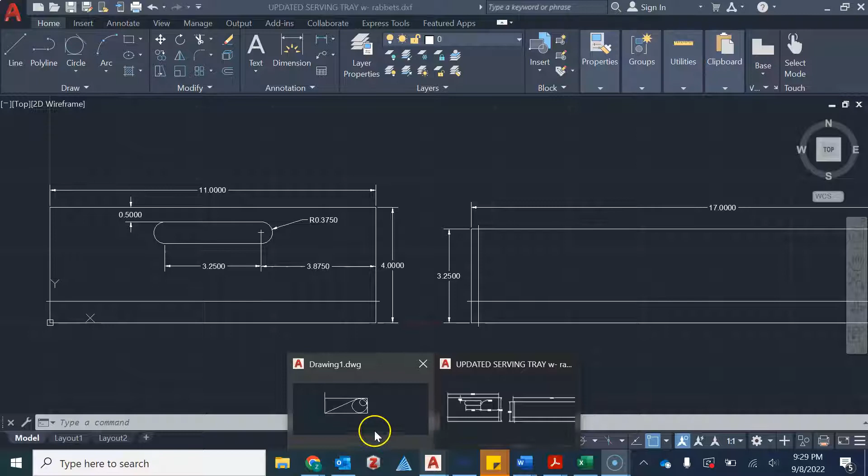This time we are looking at the modify portion of AutoCAD and some of the features that you have available to you that might make things easier for drawing up your template for your serving tray handle ends. We're going to be looking at a previous drawing that we had created, which was just simply working through some of the drawing features.

So this time, to get us started, we're going to begin with that same box that we had originally. So let me just create a new one, and I'll do it right side by side. So this is 11 inches. Again, hitting the tab is going to lock that in at 4 inches then, and enter. So you can see what we have there.

So in order to kind of give you an idea of what you can do with this, let's say I wanted to draw only part or only one side of my serving tray handle. I could then mirror that to the other side so it would be exact. So one thing we could do is offset, which is under the modify section here. But before we offset, we have to have a line to actually offset.

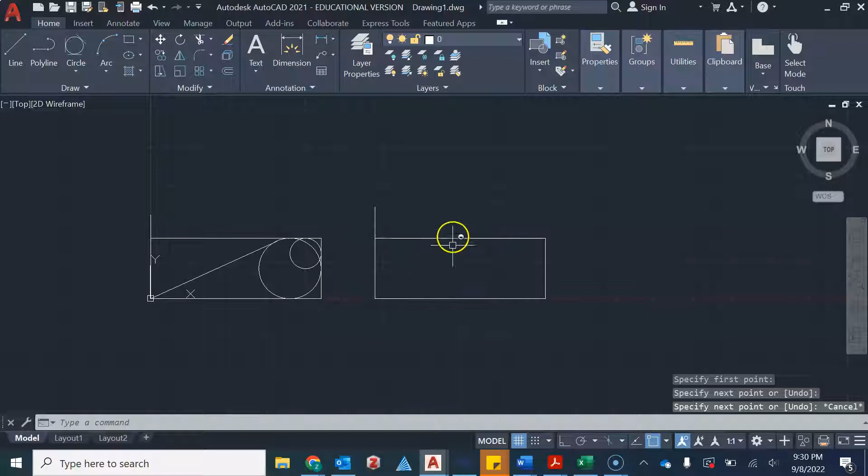So different from Onshape, for those of you that had a prior experience in that, you could offset like one part of a rectangle or square. Here you have to put in a new line that you would then offset instead. So I just created a vertical line just so I know what I can offset from. The offset icon in AutoCAD looks like a sideways U or a C, if that's what you want to call it.

You would specify the offset distance. In this case, it is 11 inches total, so that would be 5.5. And I would hit enter, and then it says select object to offset. In this case, it would be that vertical line. And the direction that you move your cursor is going to tell us which way it's going to offset.

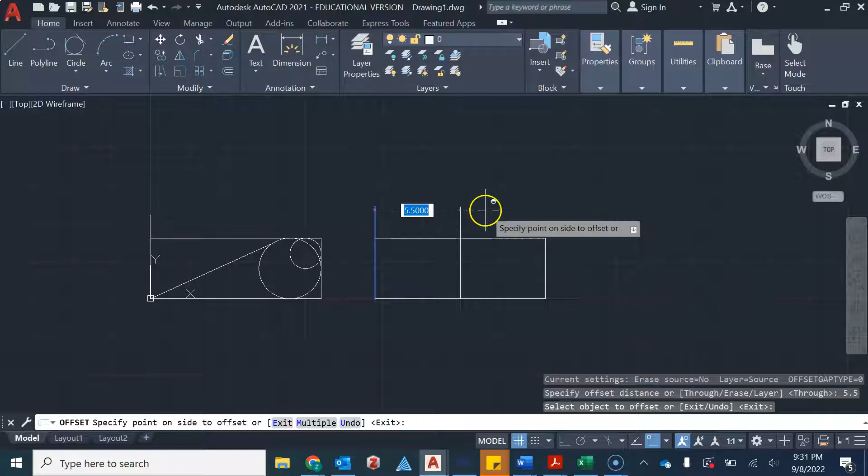If you remember in Onshape, offset was done using a similar icon, but you actually clicked the direction you wanted to offset the object, shape, whatever you wanted to offset. So there is our mirror line. So now I could go ahead and maybe add in some features here, like the end, the corner, if I wanted to have something special.

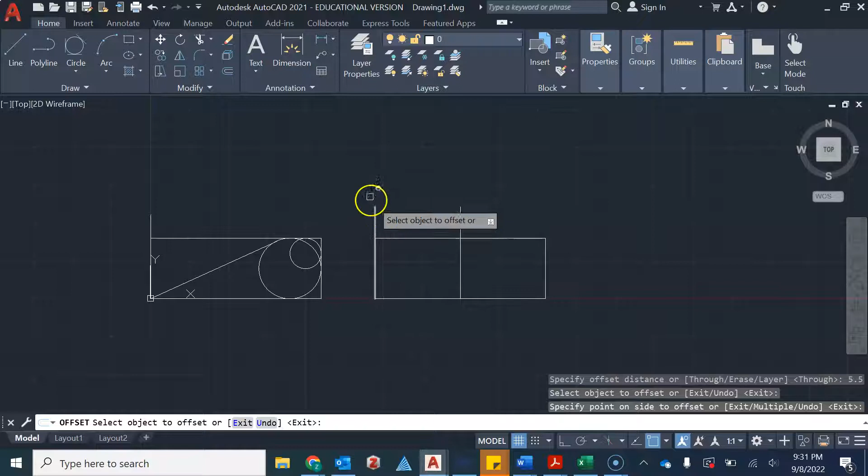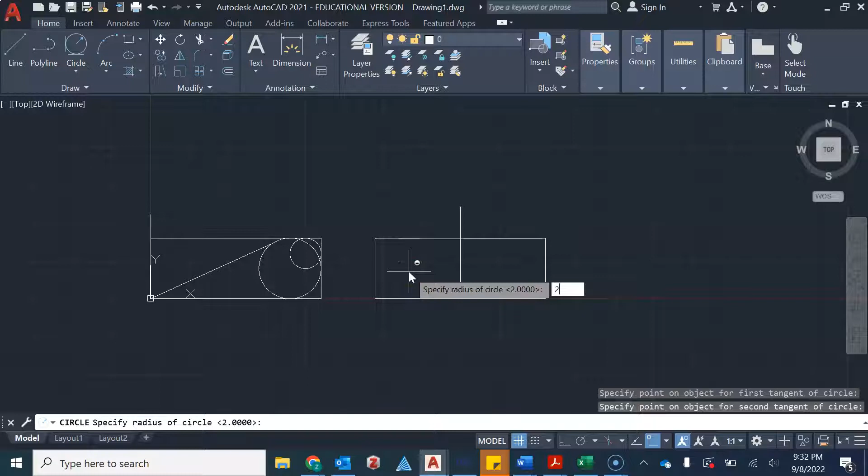So looking back at some of our drawing options from before, let's say I want to do a tan tan radius, and I want that to be 2 inches in radius. I could then go ahead and use the trim tool, which looks like a pair of scissors, and I can go in and just delete things that I would want to get rid of.

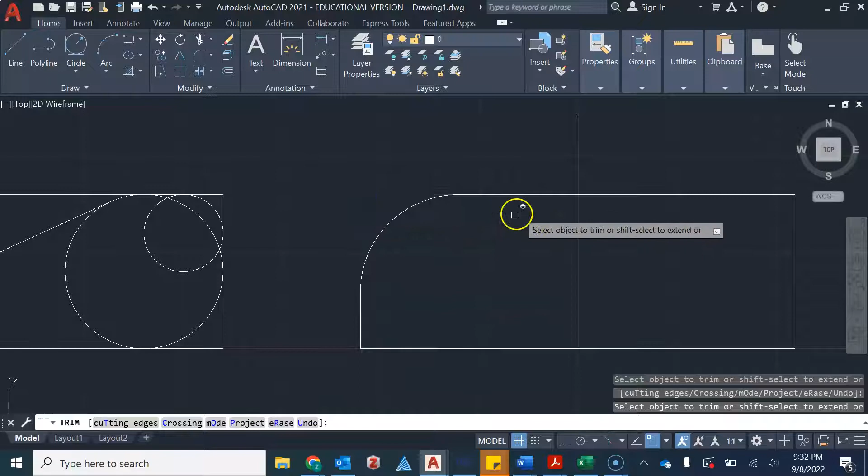So I would get rid of this outside part here, and now I can use that as my mirrored feature. So instead of mirroring the entire shape, I can just mirror this radius here. I'm going to hit escape. The mirror tool is also under the modify section, and it looks like a triangle, two parts of a triangle.

So the first thing it asks you to do is select your object. This is the object I'd like to mirror. I specify my mirror line, or the first point along my mirror line. So this is going to be my mirror line in the middle. I choose my second point of my mirror line. And then it asks if you want to erase source objects.

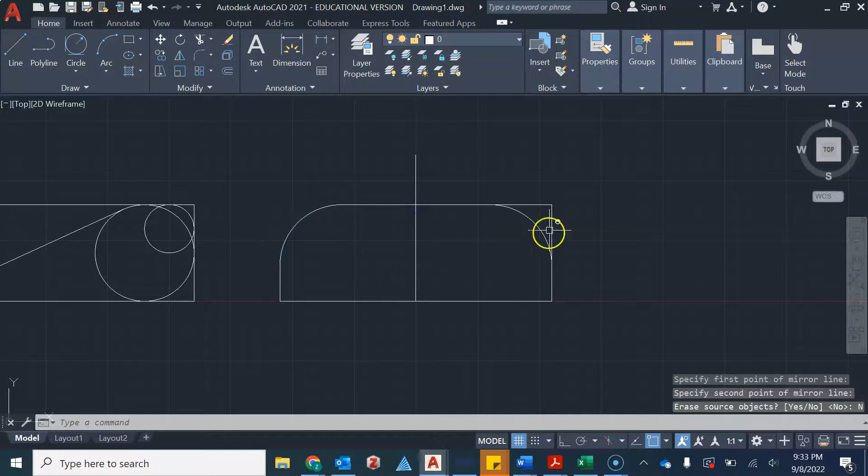You could, if something was easier to draw in one view versus another and then you wanted to mirror it. However, for our purposes, we're always going to keep our source objects. So no, we do not want to erase that. So there it is. There's the other end. Very easy to use and very helpful. I can then trim this. And I'm all set, ready to go.

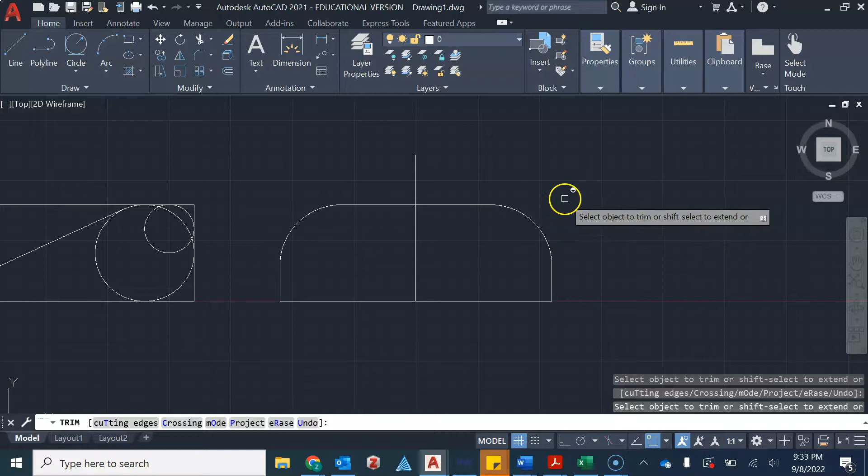So now we could go ahead and actually move forward with the project and getting this template printed and traced onto our project. So hopefully this helps you as you are working through some of the details of your template for your serving tray. If you have any questions, feel free to ask.